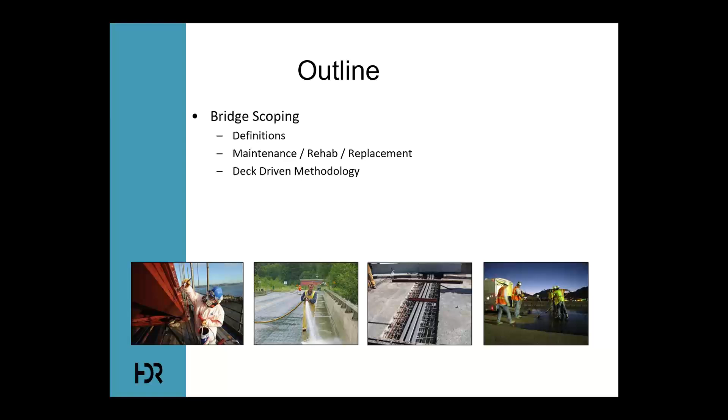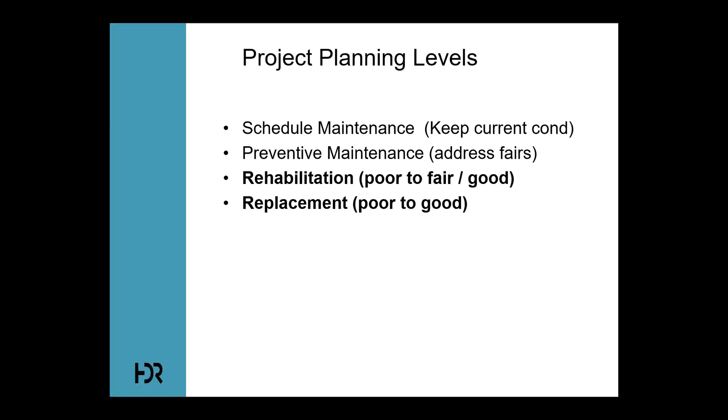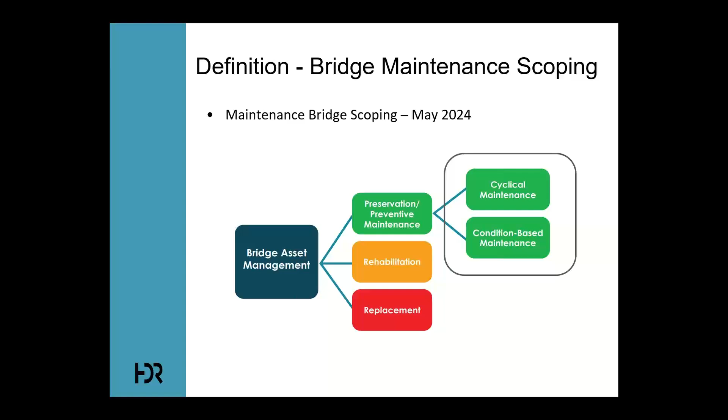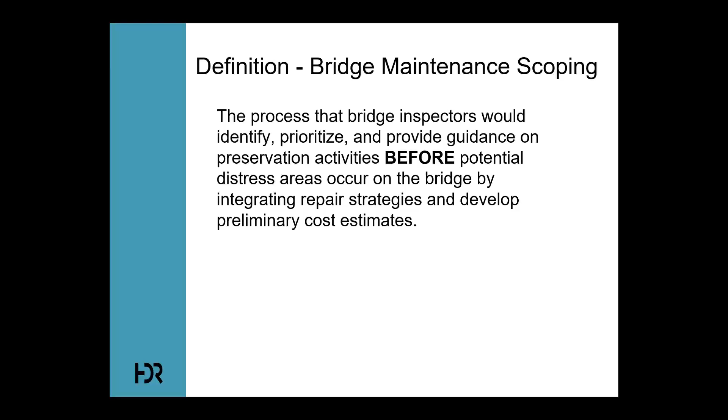So like I said, today we're going to be talking about rehabilitation and replacement. I believe at a previous webinar, we talked about within this group, maintenance bridge scoping in May of 2024. That presentation should be somewhere on the bridge preservation website. In that presentation, we talked about what kind of things you can do for cyclical maintenance and condition-based maintenance, just to refresh people's memory, or if this is new to you. So when we're talking about bridge maintenance scoping, we're talking about data collecting from the bridge and identifying activities that should be done before major damage happens to the bridge or major deterioration, and integrating those strategies into your day-to-day activities. That was from May 2024. We can always talk about it again in the future, but that's not what we're talking about today.

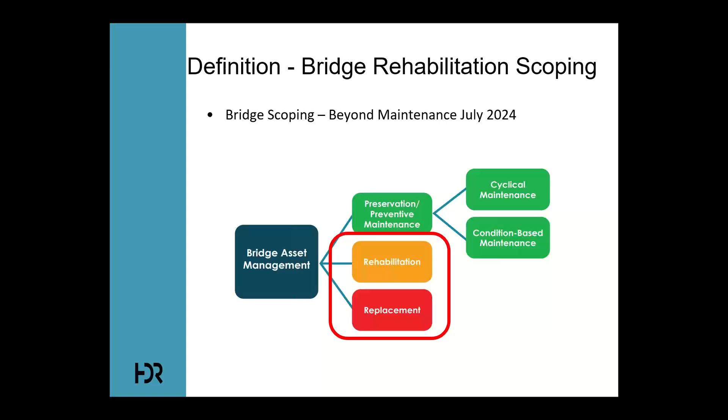Today we're talking about bridge asset management strategies, rehabilitation and replacement, primarily focused on some deck rehabilitation strategies.

So why do we scope? Scoping - all agencies are supposed to have an asset management plan. At least all state agencies are supposed to have one. Example in Michigan is we have a Michigan Transportation Asset Management Council. For the local agencies, they develop a statewide local agency asset management plan that all the local agencies roll up into. It's to establish funding goals, life cycle forecasting of all the assets in the state, as well as investment strategies and providing monitoring triggers.

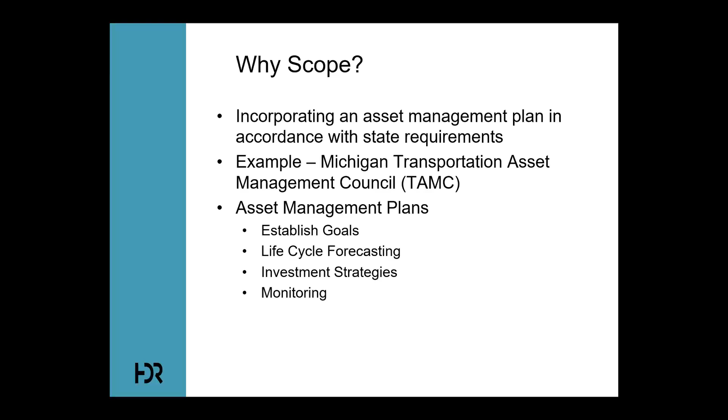So that's all part of traditional bridge scoping. That inventory collection is the site investigation, and then you take all that data as part of your scoping process, and you develop plans for your asset management from there.

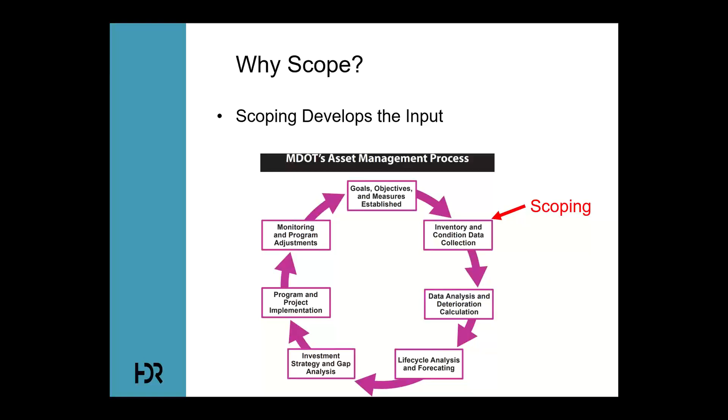So what do we do when we find out that we have something that's beyond maintenance? How do we address it?

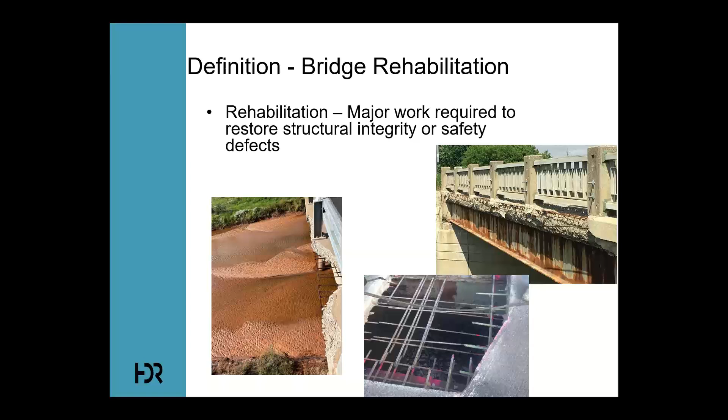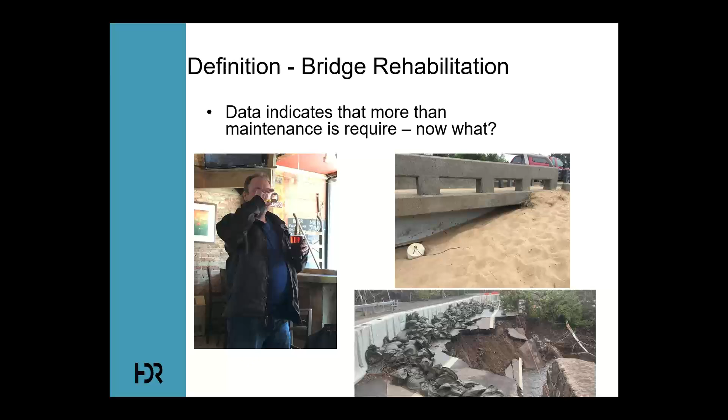So in Michigan's case, they developed the Michigan Bridge Deck Preservation Matrix. They have one for uncoated and they have one for coated reinforcement. It's very easy to find, available to anyone in the public. All you need is the internet search term Michigan Bridge Deck Preservation Matrix.

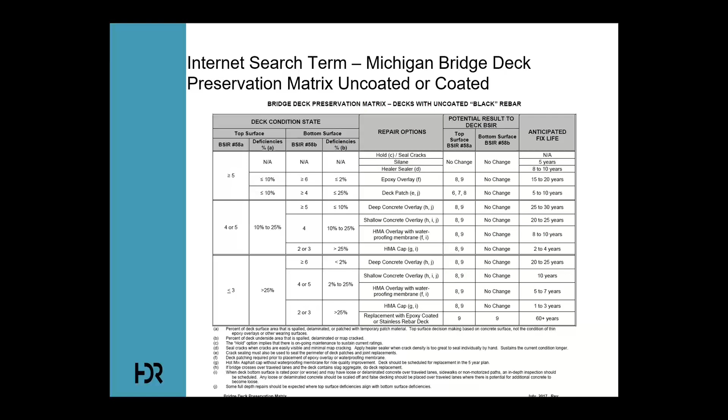And then if you're looking at a bridge deck that's uncoated or coated reinforcement, it's got separate matrices. What I'm showing here is the uncoated matrix. That is our decision-making tree for, okay, what do we do? We've got all our scoping data together, and now what are our options? So in the top third of the scoping data, it's really a deck-driven decision matrix. The other parts of the structure are kind of ancillary to that for the decision matrix in Michigan, and it's all based on condition state.

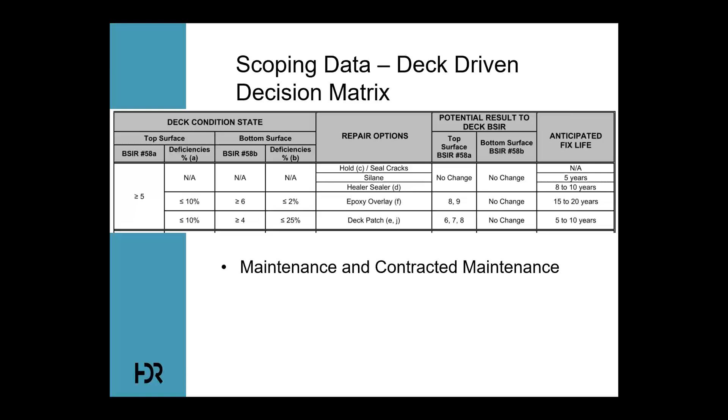A lot of if-then boxes. If your condition of the top surface is greater than or equal to a 5 in your deck rating, then there's the then statements. If our deck bottom surface is greater than or equal to a 6 and has less than 2% deficiencies, we can do an epoxy overlay. If it's greater than a 5 and we still have less than 10% of delams in the top, and our deck bottom surface is greater than poor, which is a 4, you can still think about doing a deck patch. And then this matrix also gives an anticipated fix life. These are where you're going to do your maintenance and your contracted maintenance type of projects.

Continuing further down in the deck matrix is where you get to bridges that are in worse condition. Travis is going to go over some case studies and better identification of that. But this matrix is really great for a visual representation of what your condition is and what you can anticipate. For example, you have a bridge deck top surface that is a 4 or a 5.

Your deficiencies are between 10 and 25% delamination in the top. That's probably more than you're going to want a deck patch. You start looking at, okay, my deck bottom is still in really good shape, I can do a deep concrete overlay. That's going to restore my top surface to an 8 or a 9, and I'm going to get a fix life in Michigan of 25 to 30 years out of a deep concrete overlay. Let's say my deck bottom is worse.

Let's say it's 10 to 25% deficiencies in the deck bottom and 10 to 25% in the top. You could do a shallow concrete overlay, or you could do an HMA overlay with waterproofing membrane. In Michigan, the only time we do an HMA without a waterproofing membrane, and the only way you can get it programmed, is if this bridge is shot, but you need some ride quality to get through 2 to 4 years to the deck replacement.

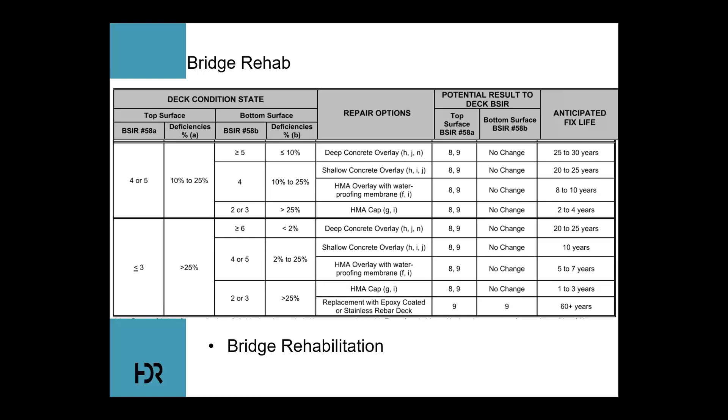I always want to take a plug for other rehab items. We could talk about possible future topics at this every other month webinar we're giving. We could talk substructure repair, superstructure repair, and scour, but that's not going to be part of today. What I mean by that is these are rehab jobs where you're going to want to contract them out, but it's not necessarily a deck-driven decision.

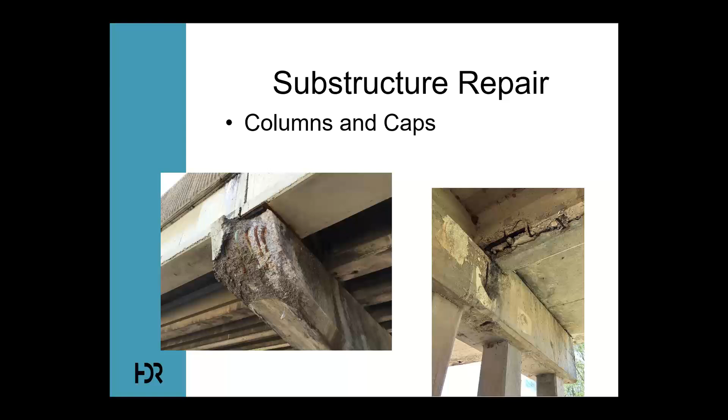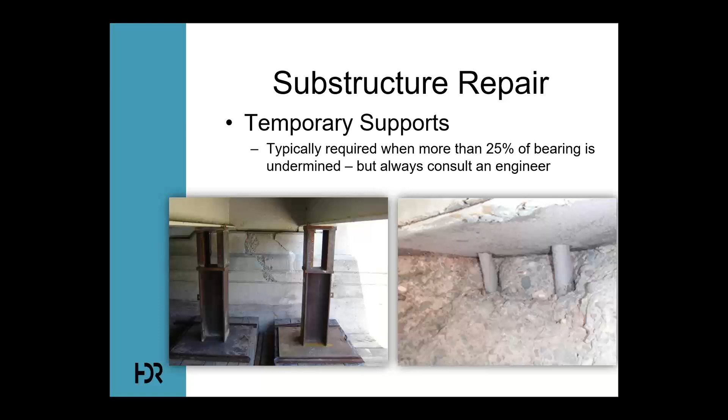You've got substructure projects that could undermine your bearing, like is indicated here. More than 25% of your bearing is undermined, you're probably going to want to do temp supports before doing your substructure repair. Always consult an engineer before removing concrete from a substructure, just to check with them.

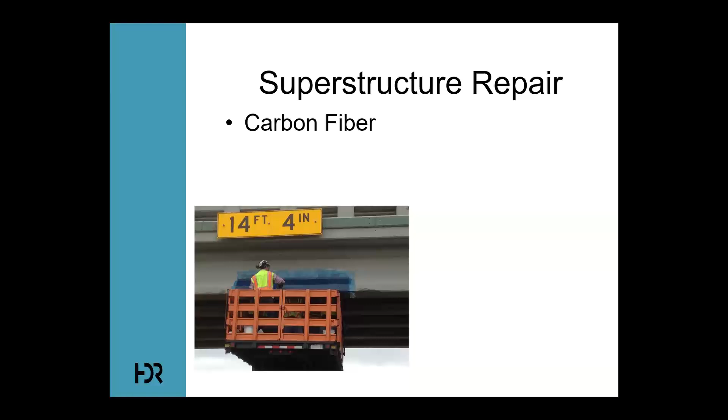Superstructure repair, there's a lot of different things you can do. Concrete beams can be carbon fiber wrapped. Some people can do that with a maintenance crew, some people contract that out. This picture is one of our maintenance crews installing carbon fiber wrap on a bridge beam that had been mildly damaged from an overheight vehicle.

You can also do steel repairs to beams where you add a lot of steel plates and reinforcement to the steel beams to repair section loss. So that's another topic we could have in the future.

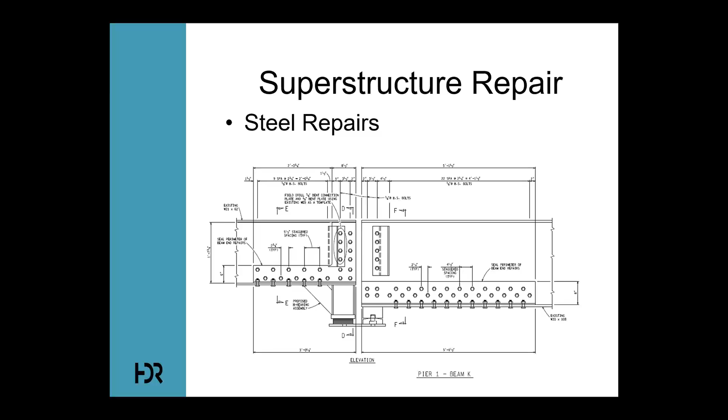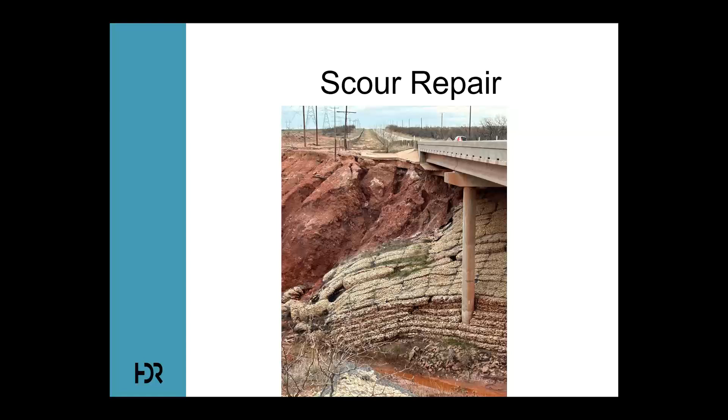Yeah, Jason, we did get one in the chat that was a pretty good question that I don't know off the top of my head. Does your epoxy overlay provide a condition benefit in the SNBI deck condition coding?

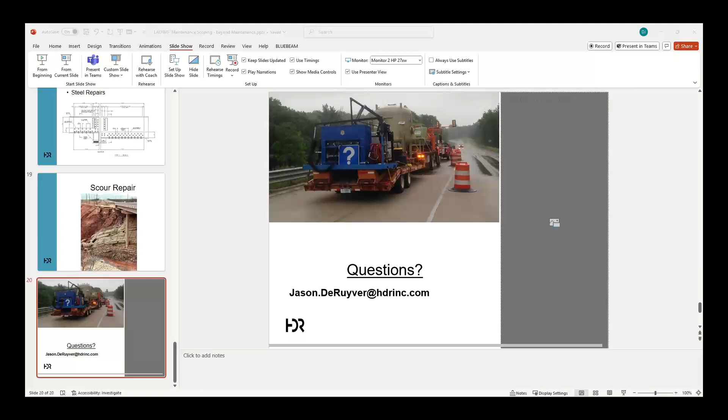I'm not sure. On deck coatings, it's almost a state-by-state debate on whether it comes down to your state's bridge inspection engineer or program manager and how they want to count an epoxy overlay. It's very open to interpretation, and I've heard lots of arguments on that. That's a great question without a specific answer because it's vague. If I was paying for the overlay, I'd argue it has some benefit, especially if it's addressing deck cracking, but it's something you'd have to work through.

In Michigan, we count it as improving the deck surface rating. But you also have to understand that before you do a thin epoxy overlay, you typically do deck patching first. And when you're doing the element rating, there's an element for unfilled cracks and one for sealed versus unsealed cracks. So those cracks are now sealed by the epoxy overlay, covered up, and not going to leak anymore. So there's an element benefit as well.

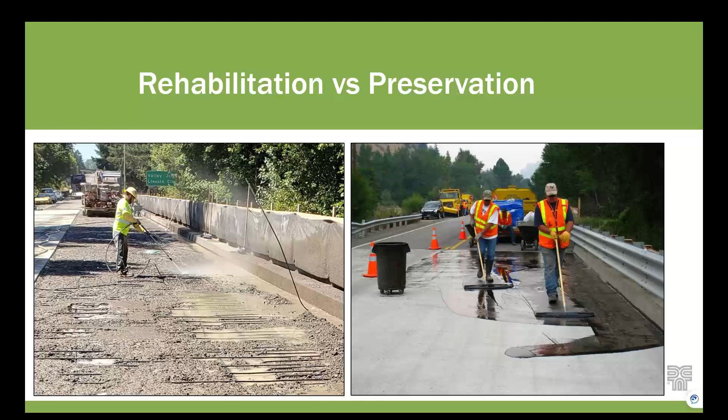This first slide hammers home the difference between a rehab project, which we're focusing on today, shown on the left, and a preservation project on the right. Unfortunately, the bridge on the left probably didn't get those easier preservation-type projects at a timely point in its life, so it deteriorated to where you no longer had the choice to do a nice thin epoxy overlay—you had to do something more invasive. So as you watch today's presentation on what rehab looks like, if you think 'that's a lot of work,' focus instead on those nice-looking bridge decks on the right, and put your resources toward keeping decks in good condition.

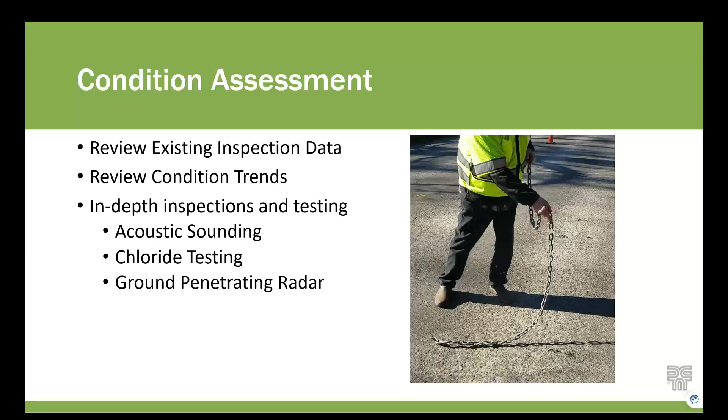Any good bridge deck project starts with the condition assessment. You can review existing inspection data that's already readily available, look at condition trends to see how the bridge is changing over time, and then do more in-depth inspections and testing to fill in missing pieces.

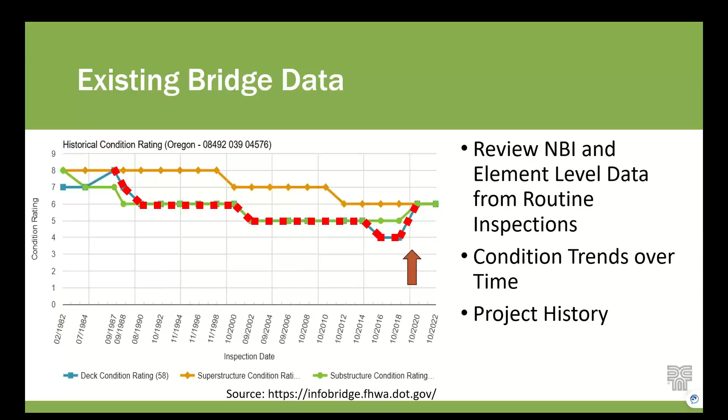GPR, ground penetrating radar, is used to look into the concrete. It's very useful for getting reinforcement depths, and based on how the signal attenuates, you can even start doing deterioration modeling to see if the material around the rebar is starting to deteriorate.

Chloride testing: salts in our bridge decks are bad. They get there from all kinds of different sources, usually applied by the folks responsible for maintaining the bridges, as part of a de-icing operation. Whether it's mag chloride or actual salt, the chlorides get down to the rebar, which causes it to corrode and spall off the concrete. To test for that, you can pull a concrete core and do some testing on it to figure out how deep those chlorides have actually penetrated into the deck.

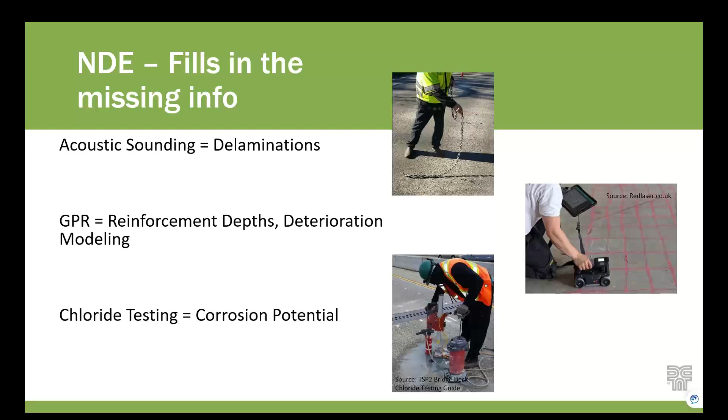However, some of that NDE testing I mentioned can help tell me how bad it is. In this case, it was chloride contamination at the rebar level. We did some NDE testing on this to see how deep the rebar was and how deep the chlorides penetrated, to give us an idea of how much removal we might be looking at doing.

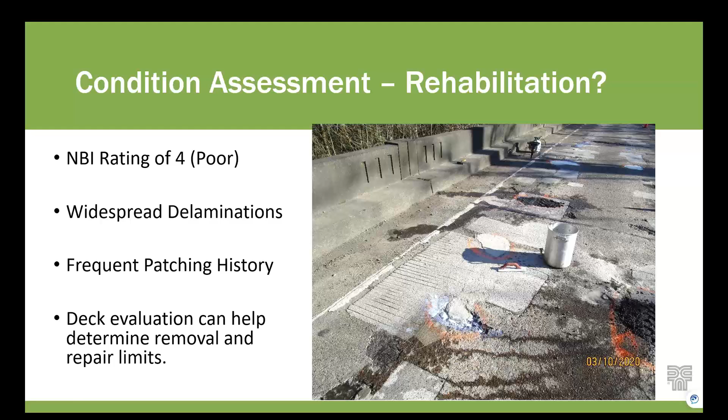I'd just flag that the poor maintenance crew was going crazy having to come back and patch this over and over. You can see the black cold mix asphalt patching material starting to go down - a clear indication that crew has given up and is telling the rest of us this is beyond maintenance, someone help. NDE can help fill in those missing pieces.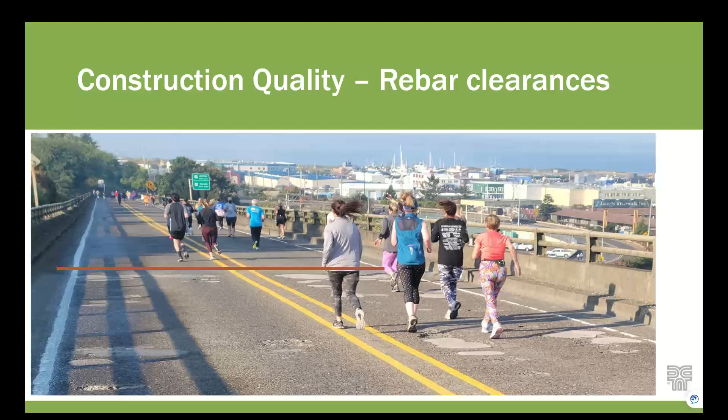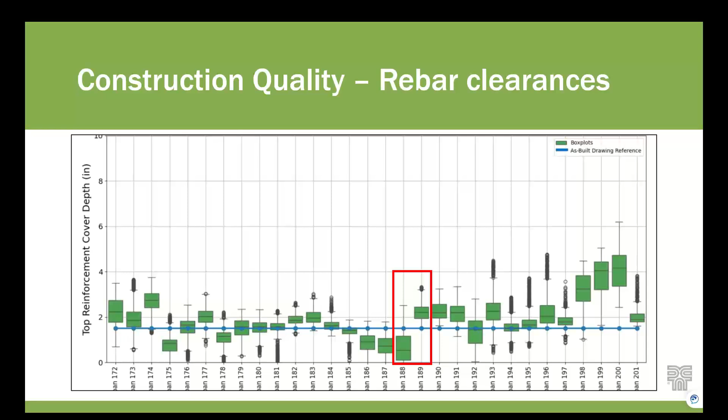We did some scanning on this bridge deck and found that the reinforcement depths changed significantly. This is a box and whisker plot of reinforcement depths, but you can visually see that right at that joint there was a big jump. They got good clearance on one side of the joint and very poor clearance on the other. That was a construction defect that led to a very significant jump in serviceability.

We discussed this with the local maintenance crews for more information, to see if they could help explain why one side was so bad and the other looked quite better. What we found out is that the mag chloride tank shed is on one side of this bridge, very close to it. So when the icing truck was leaving the shed, it was full and applying mag chloride, but on the way back to the shed it was empty and didn't put mag chloride on the other side. That made a huge difference in how that deck was performing.

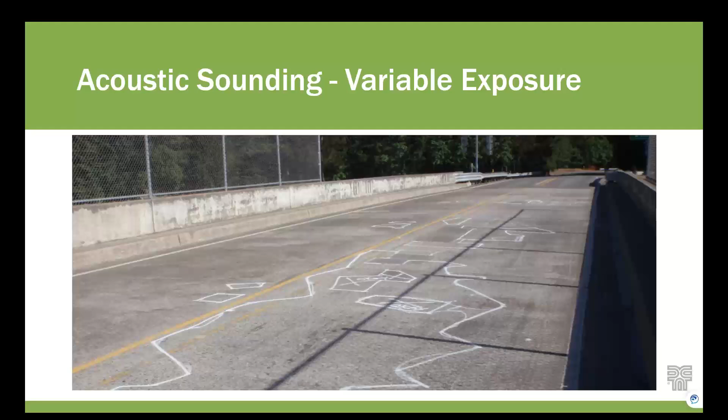You basically have stuff that's just really meant to clean the deck, so shot blasting and pressure washing. You have some isolated concrete patching, which would be kind of expected on many bridge decks. It more falls into that maintenance realm where you're maintaining the bridge deck. You can prep it for lots of different overlay types fairly cost effectively and quickly.

And then you get down to that next kind of grouping where you actually need to remove structural concrete or start doing some removal with specialized equipment. Once you get down there, you're looking at milling, selective hydro demolition, which I think Jason would call shallow hydro demolition, and then deep hydro demolition where you're getting all the way down to that top mat of rebar.

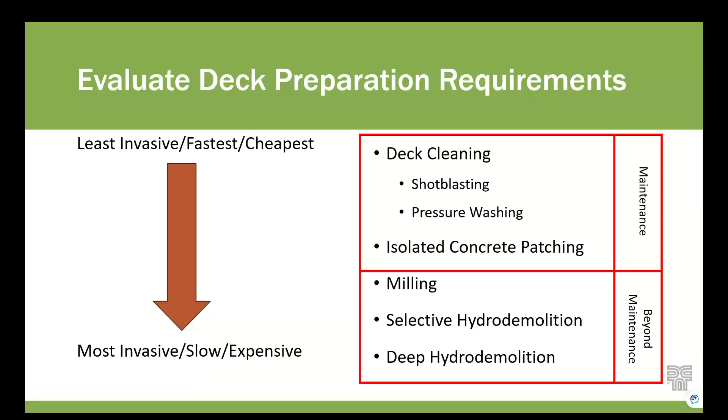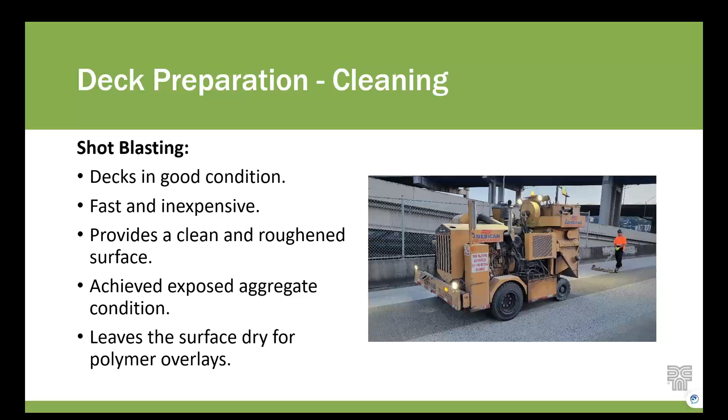Deck patching - we've done a whole training on deck patching, on concrete patching. There's lots to cover here, but this is just kind of an idea of it. If you find yourself patching most of the bridge deck, it's a good indication that patching is not going to be your solution; it's just a temporary repair. If you're doing small quantities and using good prep, then it's very likely that you fixed the problem, it was localized, and you can get some good service out of that deck.

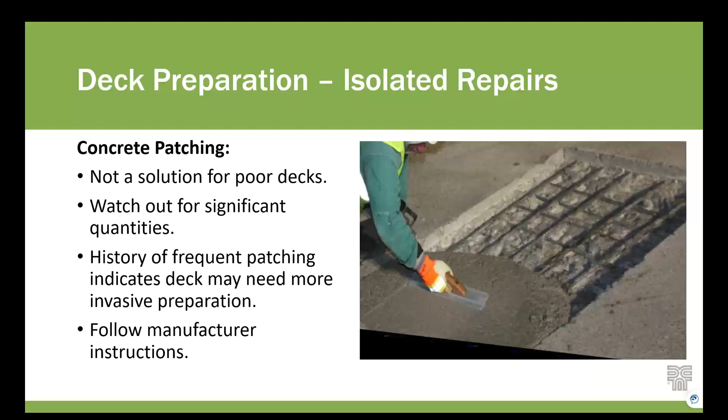Milling - this is when you want to remove material from the deck. This equipment is great in the sense that it gives you a nice uniform removal. You'll see when I get to some of the hydro demo photos that the removal is less uniform. It's really pretty quick - these machines can run across the deck really fast.

If you already have an overlay on the bridge deck, then this is almost always going to be your first go-to, because you have a certain depth that you can go for and just remove it all off.

If you're removing structural concrete, you got to think about putting it back. The biggest challenge with this one is if you have shallow rebar, this will find it. So you have to be very cautious with locating your reinforcement first. As-built plans are helpful, but I definitely found wide variation in how things are actually built versus what the plans say. So find that rebar first, otherwise the contractor will find it for you.

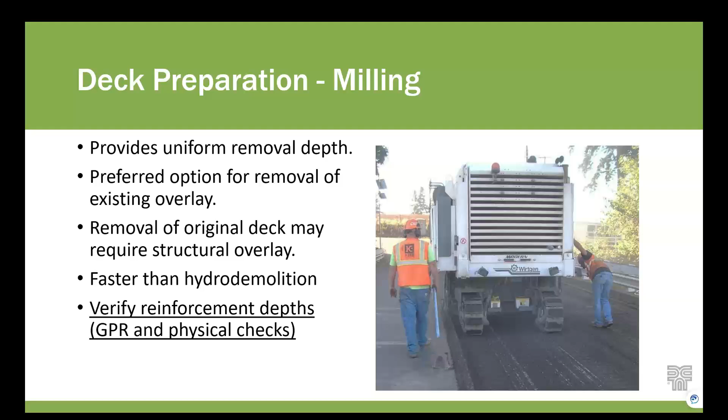Okay, so selective hydro demolition - this would be that shallow one. It's really more of a deck prep method where you're maybe only setting it to remove a quarter inch of concrete. The thing that's great about this is that it'll prep your good concrete with just a small amount of removal. And if you get to some really pretty poor concrete, then it'll scour itself down and remove that bad material. That's why it's called selective hydro demolition - the idea is that if you have certain bad spots, it'll get those, and the rest that remains should be good, sound concrete.

So this goes much faster than a deep hydro demolition and provides just an outstanding surface for a cementitious overlay to go on top of. Okay, deep hydro demolition.

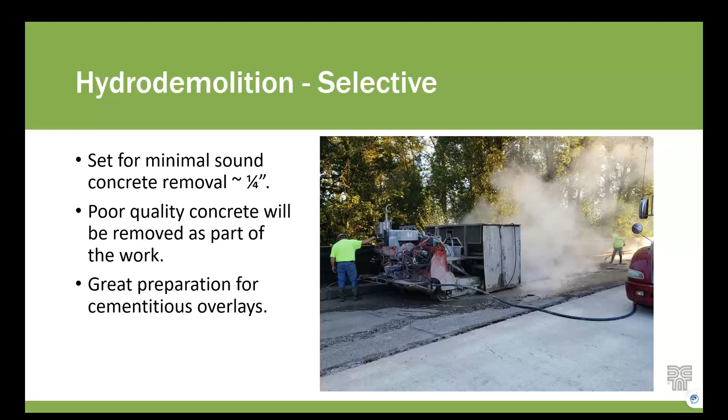I say this is your best option when your chlorides have reached the reinforcing level. I would argue that's probably actually your only option when it reaches the reinforcing level - you can't go and mill yourself down into the reinforcement. Once you need to remove material all the way around the reinforcement, then this deep hydro demolition is going to be your best bet. It is much slower, so from a cost standpoint, you don't want to specify this unless you have to.

Going to have a lot of wastewater generated with this. The more concrete you remove in a single pass, the more likely you're going to have what we call a blow through, where you might actually blow all the way through the bottom of the deck. So you want to be careful of what you're doing this over. Like if you're over railroad tracks or sensitive streams or traffic, you might need to think about having containment installed underneath, or doing some isolated full depth repairs first.

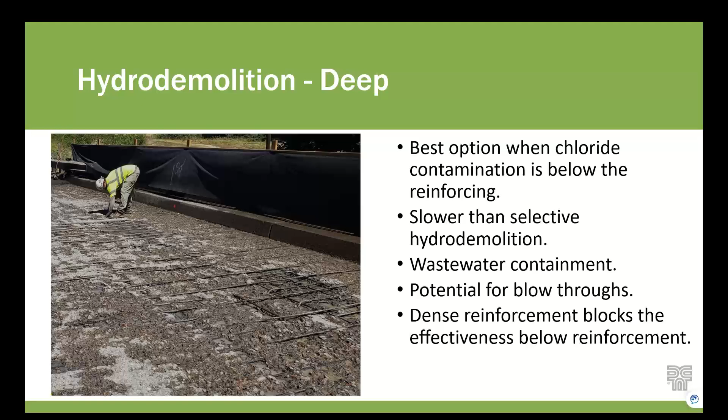And then, it's difficult to get past the reinforcement. So the denser your top mat of reinforcement is, if you have those negative moment areas at interior bents where you have just a pile of steel there, it's going to be really hard to blast down below it. So just know that that's going to take some additional work.

Note that you're removing structural concrete, especially if you're getting down to that rebar. So you want to be real cautious with how you're doing that. Sometimes these bridges are built on scaffolding and false work, so that until that deck is poured, the bridge is unstable. And so you could actually make a bridge unstable if you're not careful with how you're doing this.

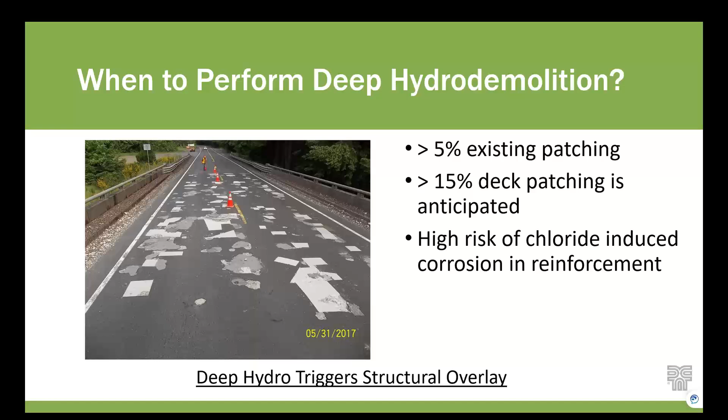And then you need to replace the concrete you removed with structural concrete as well, to go ahead and return that strength to the deck and maybe even the whole superstructure.

I didn't want to just focus on concrete overlays here, so I wanted to give a quick nod to all the different treatments that we have. Those first 3 listed are more of a preservation-based or maintenance-based action. Sealers: if your bridge deck is in good condition, just sealing it can give you some additional service life. Then you have thin epoxy overlays, again usually used when your deck is structurally sound but maybe needs a new wearing surface, though you have a good deck to start with.

Then you have PPC overlays, which have maybe a longer service life than those first 2. Typically you wouldn't pair this with a deep hydro demolition because it's not considered a structural overlay. And then you've got your cementitious overlays, some of which have been around for a very long time. These concrete overlays have been a bread and butter, whether latex modified or high early strength concrete or microsilica overlays - a wide variety out there over time. But I kind of lump them all into two categories: your more traditional concrete overlays with that longer 7-day plus cure window, and your high early strength concrete overlays that take off like a rocket for needing to return to traffic quicker. Either of them, depending on your staging, might work well with a hydro demolition.

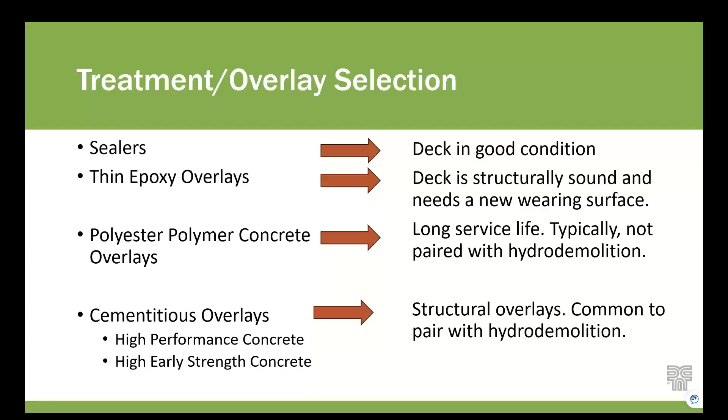Okay, so we'll get to some good construction photos now. This is a case study: the Yamhill Overflow Bridge. It was built in 1963, it's 300 feet long, only a 6-inch thick deck, very thin, and it was only supposed to have been built with just 1 inch of design clearance. I can tell you for sure they didn't even hit that 1 inch in lots of spots. And it actually has a pretty high traffic volume - 23,000 vehicles a day using this bridge. The bridge crew fondly, maybe not so fondly, referred to this bridge as the bombing range.

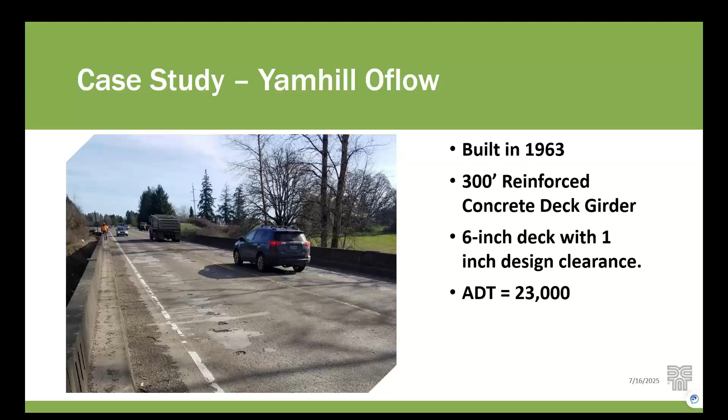I just love this picture on the left, patches on patches. The photo on the right just shows that exposed rebar. I didn't need to do a ton of GPR scanning on this bridge deck to figure out where the rebar was, because I could just see it in lots of spots. So we went out and measured it and found that the rebar was 1 inch or even less in many spots from the original design clearance.

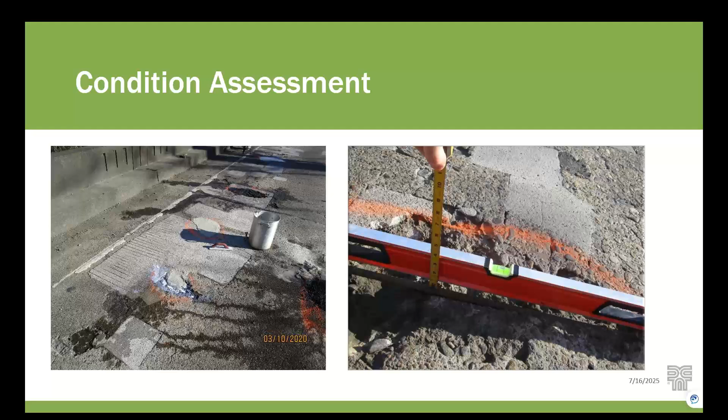Our condition assessment: the bridge deck is in very poor condition, tons of patching. You have reinforcement less than 1 inch deep. You've got high levels of chlorides. And what we concluded is that we really do need to remove 1 to 2 inches of concrete. So knowing that our reinforcement is only about 1 inch deep, we're doing what we would call a deep hydro, because we're trying to get below that reinforcement.

So we knew what we needed to do to prep the bridge deck. We needed to pick an overlay to pair with that prep. Since we're removing structural concrete, we knew we were going to either do one of our traditional concrete overlays or a high early strength concrete overlay.

One of the other project constraints is that the deck is pretty narrow, so staging it with one lane open wasn't very viable because of traffic volumes and workday commutes. The only permission we could get for closures was on the weekend, so we needed something where we could get on Friday night and be done by Monday morning. That really limited us to only selecting a high early strength concrete overlay as a viable option to repair this deck. So I've got some construction photos here that we'll run through the process.

This is the hydro demolition unit. It's supported by water trucks and baker tanks to collect the debris. It's got a whole truck on a trailer that's got the pressure washer generation. This is a single nozzle straight line unit that runs at about 15 to 20,000 PSI.

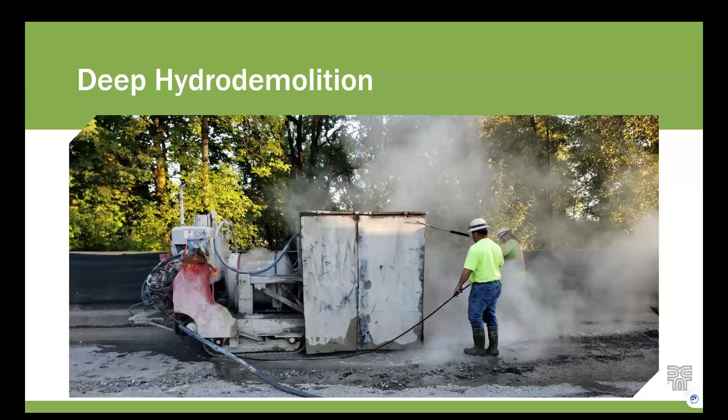Just another view of it. The unit kind of inches forward one inch or so at a time. It's all calibrated. You start off tweaking the adjustments to figure out what kind of removal you're looking at, or to hit your target removal depths.

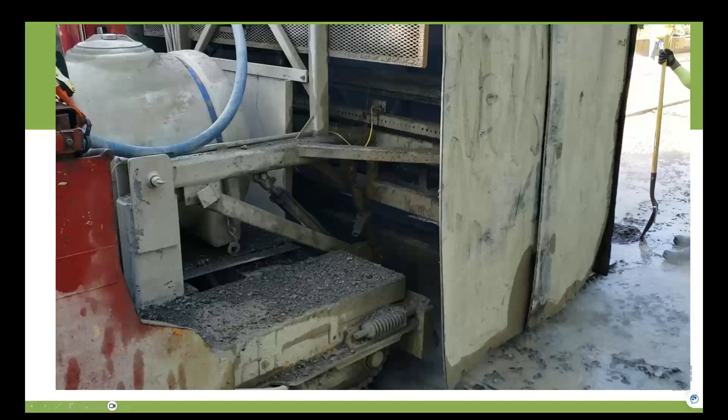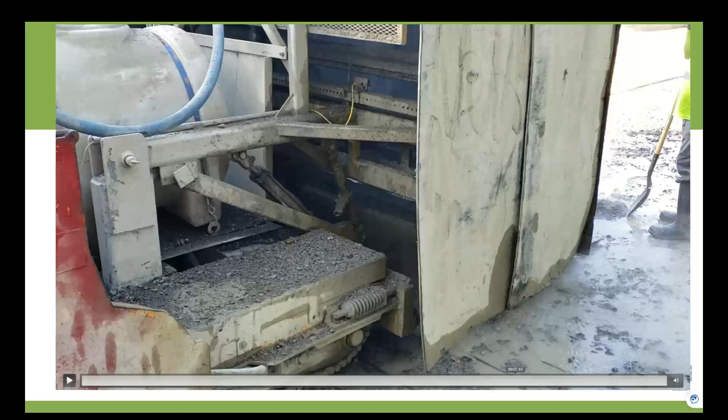Let's see if we can play this little video here. Hopefully that played okay. Usually I have a rule of not putting videos in PowerPoints because they tend to struggle. But you can notice that it just goes back and forth and then advances one little space and then runs again. I'd just note that there's a lot of debris that kicks out to the side as this thing goes through, because it's really just rubbleizing the concrete underneath it.

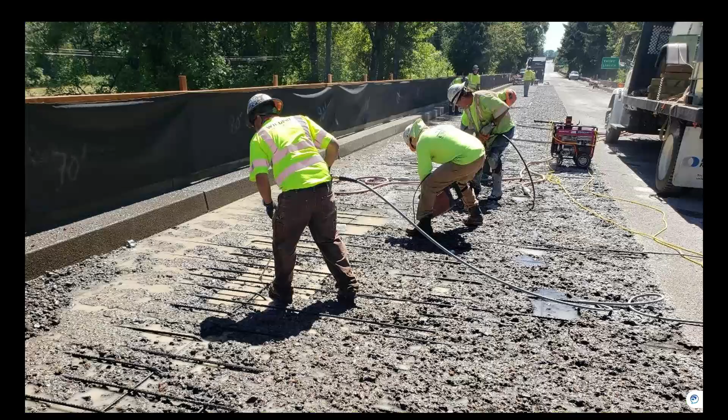Once it's made its way across, this is more what your bridge deck will look like. You can see it's not necessarily a uniform removal. You've got some spots where the concrete was in really good shape and didn't want to come out, and other spots where it was scouring down, and maybe we even found the bottom of the deck at some point. Some of those rebars that get partially exposed become problematic because they could be loose, and you want to get good concrete consolidated around it.

They're kind of all in a line here, so it's hard to tell, but you have several folks running with chipping guns, chipping around all the different reinforcing bars to get the ones that aren't sound, getting some exposure underneath so that you could get good concrete consolidation. So just a lot of labor to make that happen.

Here they are still working on that debris removal. Just note that you're starting to get like a berm as they're trying to pile all that loose aggregate over to one side. You've got all that wastewater to contend with. I'll maybe direct your attention to that sandbag in the middle there - that was part of their containment plan for if they were to blow through the bridge deck.

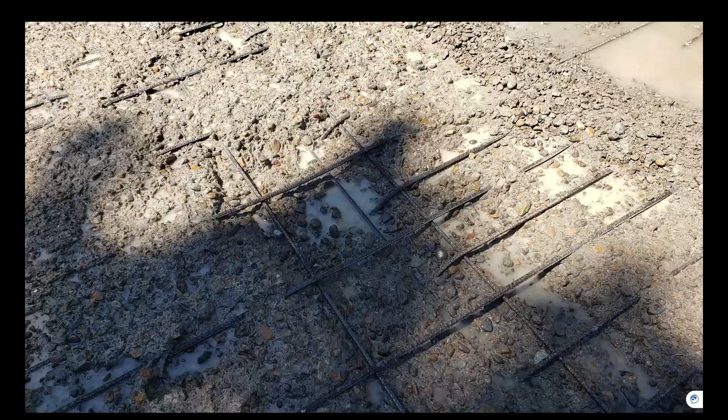So they had a couple of isolated locations where the deck was in such poor condition that it just blew a hole right through it. So that's something to be paying attention to as you're going. Again, I just highlight that with this deck in such poor condition, you get a highly variable removal here, and it's just a lot of work.

It's really cool to be part of these projects. One, because you've got a pressure washer that's just rubbleizing concrete - that's fun to watch. And to watch the deck take that transformation of removing all that bad concrete and getting it prepared. But boy, it sure takes a lot of folks working at it.

Once the surface is totally prepared and totally clean, they go through and blow it off to remove standing water. You want to keep it damp after all that work of getting it clean and prepared. You want to protect it, so they roll out plastic over the top of it, and then roll that plastic back as they put their overlay down.

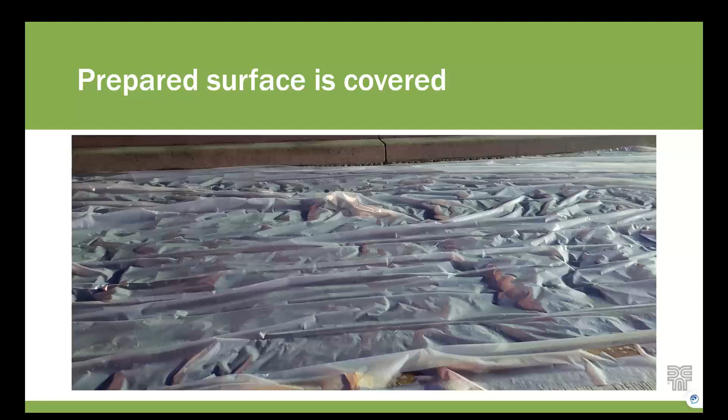For these high early strength concrete overlays, I know they could go down with the Bid-Well. However, in my experience on the projects I've been involved with, the contractor has almost always submitted a request to use a rolling screed instead. Part of their logic is that these are short-term closure windows, and it takes a lot of time to set up the Bid-Well, and these overlays cure very rapidly.

The total time from placement, wet cure, and pulling the blankets back off is just 3 hours. So that initial set doesn't take very long either. They just thought a roller screed gave them a little more flexibility to do that. On the overlays I've worked with, we have gotten good ride and performance with them, so I haven't had an issue yet.

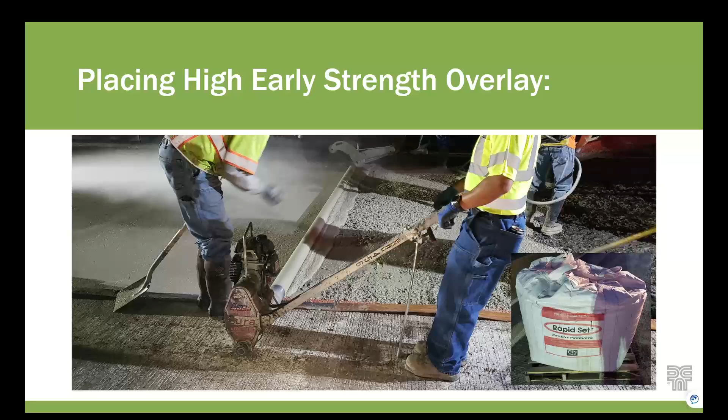Here they are, pulling that blanket back right in front of it. You can see they don't have a ton of material right in front of that roller screed. They're staying right there and keeping it moving.

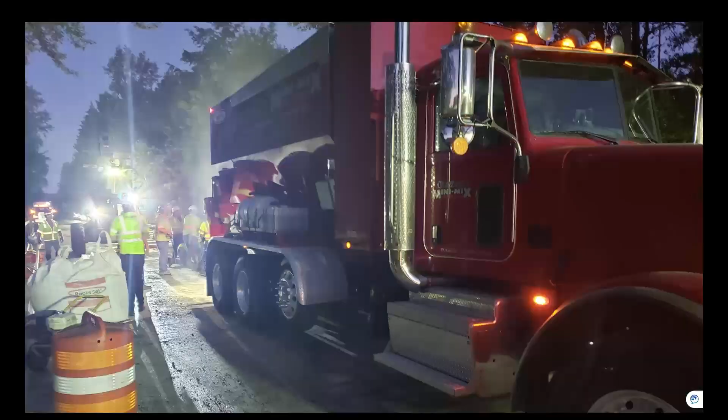For the projects I've been involved with, they use an on-site batching truck. This is a mini mix truck where they have all the water, cement, and aggregate on site together, mixed right there in the chute and then placed. I think you could use a ready-mix truck on these, you just have to make sure you're using the right retarders to keep it from taking off too quick.

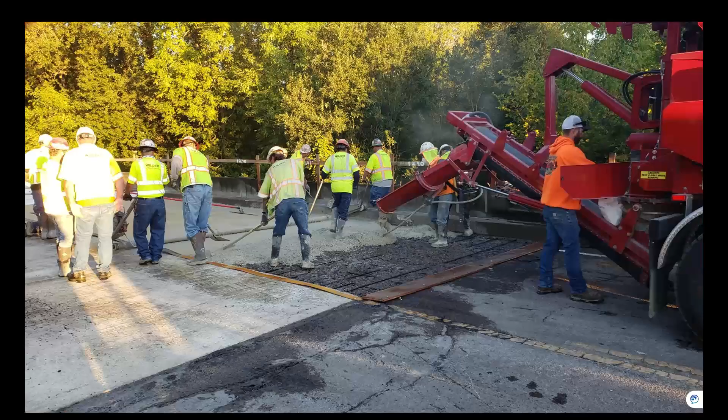Here they are, another construction photo, working their way through, heading towards their bulkhead at the end.

And then here I got a little video. The process goes quick, so they went from one end of the bridge deck to the other. By the time they got to the end, they were ready to start pulling the blankets off and open it, working their way back through. It only took them maybe 3 hours total to get across the bridge deck.

The finishing of these concrete overlays is very similar to any other concrete. You just float it, and then we use a tine finish on it. You can come back later and saw cut it if that's a preference, or saw cut the tining into it.

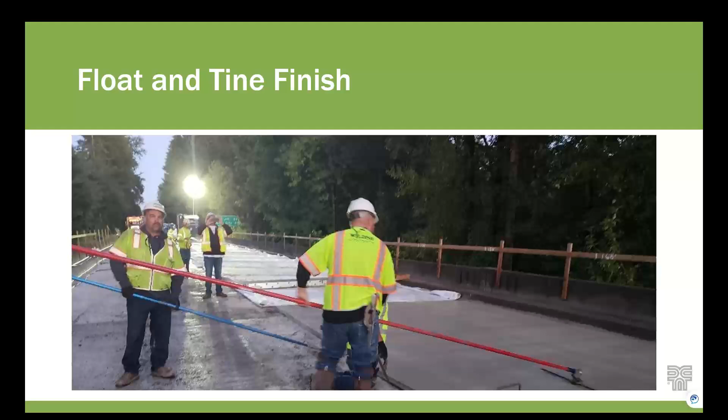The wet cure, we felt like it's pretty important to get down on these. The blankets went down right behind. The spec said within 15 minutes of the material being placed, you'd have a blanket on it and keep it saturated. Since it's only a 3-hour wet cure, we don't really have a plastic coating on top like you'd see with a more traditional 7-day cure. You just have someone manning some hoses, keeping it saturated as the 3 hours go off.

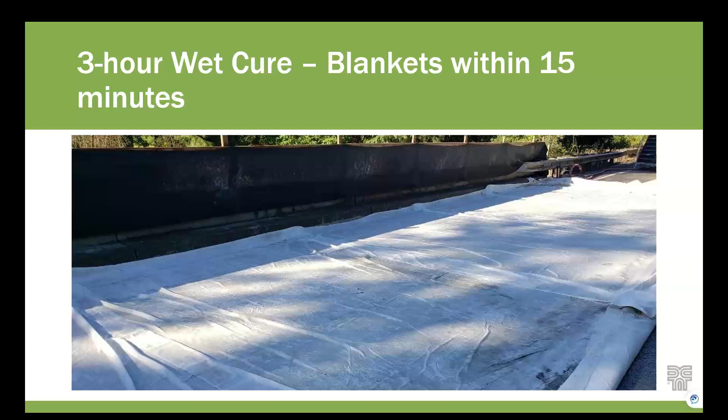You see here, above any joints, before you open it to traffic you want to get down there and saw cut through the overlay so you don't have a weak plane to break it through. And then here you can see they're already pulling the blankets back off and getting ready to open the roadway to traffic. So some things to note.

My biggest concern with these high early strength concrete overlays is that when they take off like a rocket, you get shrinkage cracking, and I was worried that we'd have cracking everywhere and that it wouldn't perform well. In Oregon, we've been doing quite a few of these high strength overlays, again with a 3-hour wet cure, then open to traffic after that. And gosh, they have been performing really well. We have not been seeing very much shrinkage cracking, or really cracking at all, in them.

They've been wearing well.

ODOT teamed up with Oregon State University to do a research report on this. This case study was one of their early examples, and they pulled cylinders from it for testing back in their lab. That should be published soon. I checked in with ODOT recently, and it sounded like the final comments were being resolved, so hopefully it'll be published in the near future. This went down during 2020, so we've got 5 years of service so far, and it's performing really well.